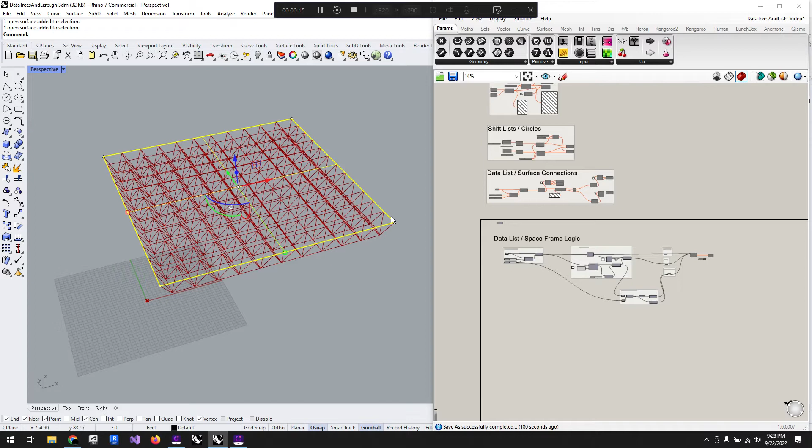So this is where we should have, during last class, been able to start having some fun and being able to manipulate our space frame a bit and start to get everything following where we were at. We've added in the bottom chords. I've done a little bit of grouping in here, so here's where we're creating our webs, here's where we're creating our bottom chords, here's where we're creating our top chords. We can see that as we move through this. Then there's our webs going both ways.

So now what we want to do is really mess this surface up. I'm going to rebuild this with maybe 4 points on each one. And I'm just going to pretend that we have some kind of glass canopy going over a cool cafe area or something along those lines.

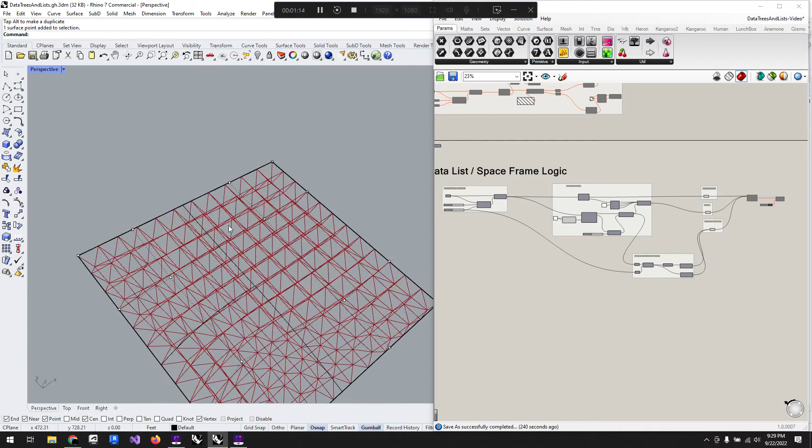And we're going to stretch this because we have a bunch of weird existing buildings that are going to be changing stuff. I don't know, just playing around with it, having some fun. We're going to twist this thing around a bit. Maybe I want it to be kind of cool. I mean, I'm not just trying to totally freeform it, but we could do that too.

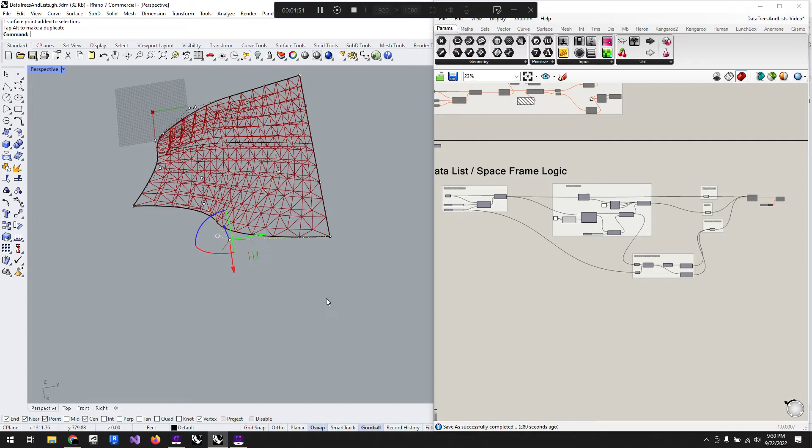Maybe we'll stretch these guys out. On this one, I'll stretch you out. And this one, we'll bring it over here. Just kind of getting it a little bit wacky, and we're doing this for some kind of good reasons.

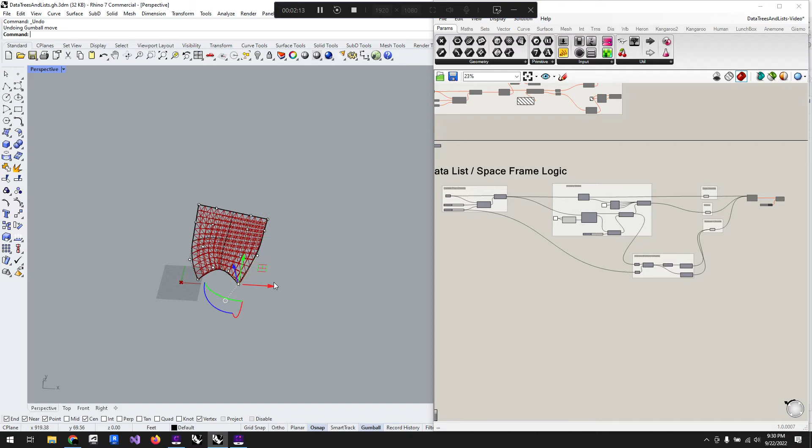And then maybe I'll pull this one up, get a little bit of an arch in there. I don't know why this is cool. Maybe I'll stop this. Actually, I'm just going to undo that, make it a little bit more simple, because I'm not going to want to look at that shape for the next hour or so.

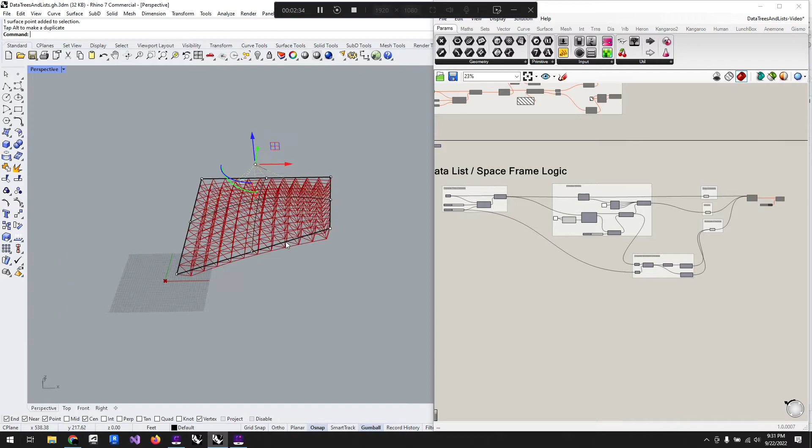While I'm doing this, I'm going to rebuild this with 3 points instead of 4, so I get one midpoint in the middle here. I'm going to grab that and give it a little bit of a dome shape. And then I'm going to pinch and pull 2 of these ends. So this end, I'm going to pull out a little bit, and pinch this one in a little bit.

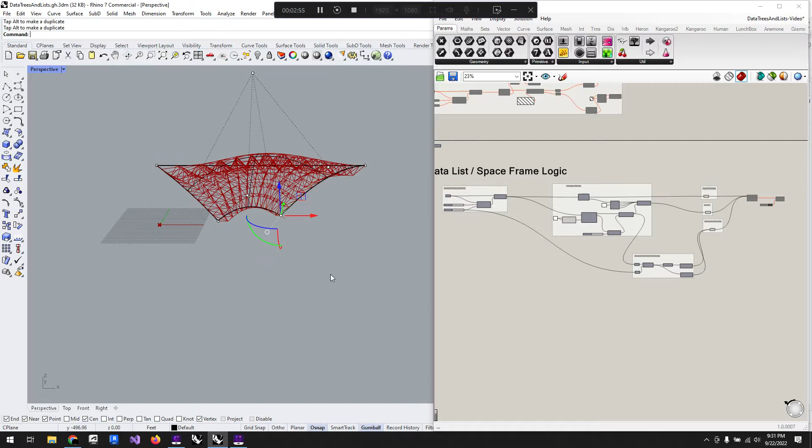And it's still not very pretty, but it's at least a little bit not as ugly as that other one I was making. So maybe this is what we want, maybe it's not, but it will serve our needs for now.

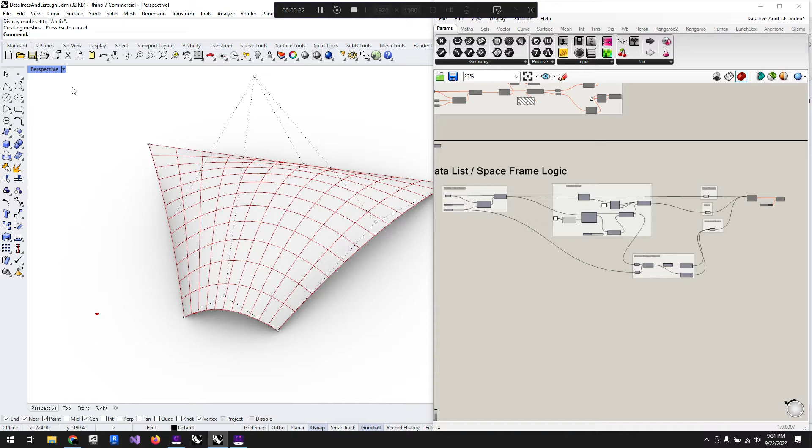So now what we have, if we look at our base surface here, and if I turn this to Arctic, it'll be a little bit easier to see. We have a double curvature surface, so these squares can't be built out of glass. Let's say we're going to do a glass canopy here - it's not going to work. We can't make glass curve that way. Well, we can, but it's super expensive.

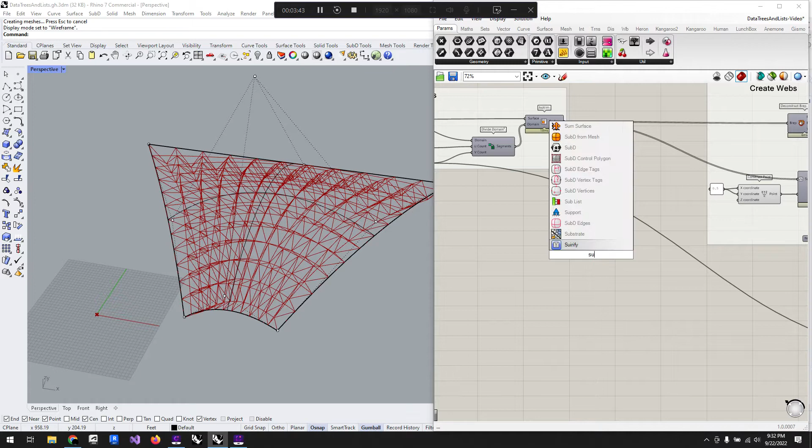So what I'm going to do is pull out all of our individual surfaces that we have. We have 132, which I think 11 times 12 gets us that, which is our domains. So I'm going to make a surface container just to drag this out and make it a little bit easier to see. And then I'm going to rationalize this so all the panels are flat, and the easiest way I know how to do that is to take each of these panels and divide them into triangles. That way, a triangle only has 3 points, and by definition, that'll always be planar, unless there's some kind of crazy 4th dimensional triangle geometry that I don't know about.

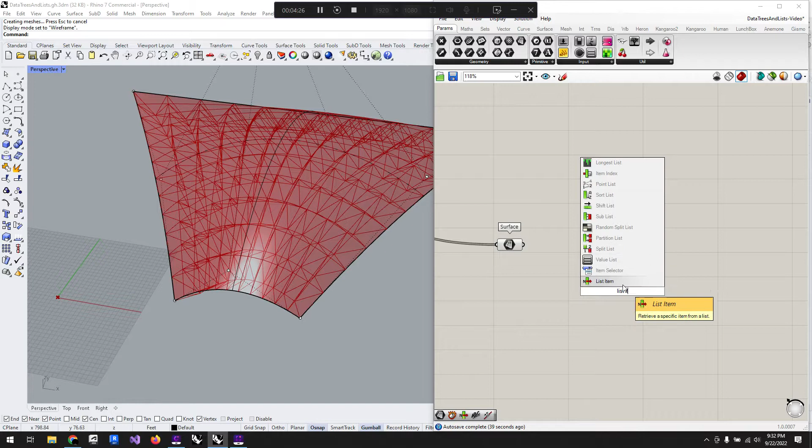So the first thing I'm going to do, since I have this list of 132, is list item - I'm just going to extract one of them. I just want one of these triangles to work on separately, so that I can get my logic right with how I want to subdivide this so that it's flat, and then apply it to everything else, similar to what we did with the surface rationalization.

So the next thing I'm going to do is deconstruct - I always think explode because of the flames on the logo. We're going to deconstruct this. We're going to take our vertices. We have 4 vertices, these 4 corner points.

I'm going to go to point list just so we can see those. The size I'm going to say is, we'll go with, hopefully 12 is big enough to see.

My logic is I want to triangulate this panel. So I'm going to go from 0 to 1 to 2, back to 0, and that'll be 1 triangle. Then I'm going to go 0 to 2 to 3, back to 0, back to 2, and that'll make our other triangle. So if I go to list item...

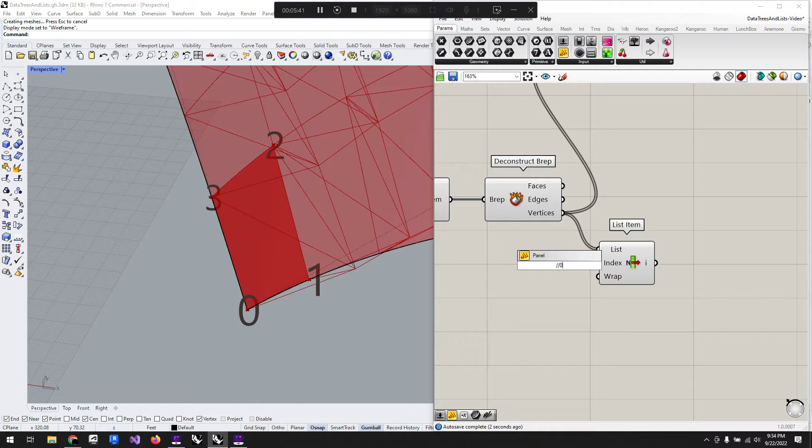I'm just going to copy this over. Instead of trying to find it, I'm going to put my vertices in here. One way I can do it, I can say this is 0. I can copy this down and say this is 1. And go on until I get all 3 of my points, or all 4 of my points here.

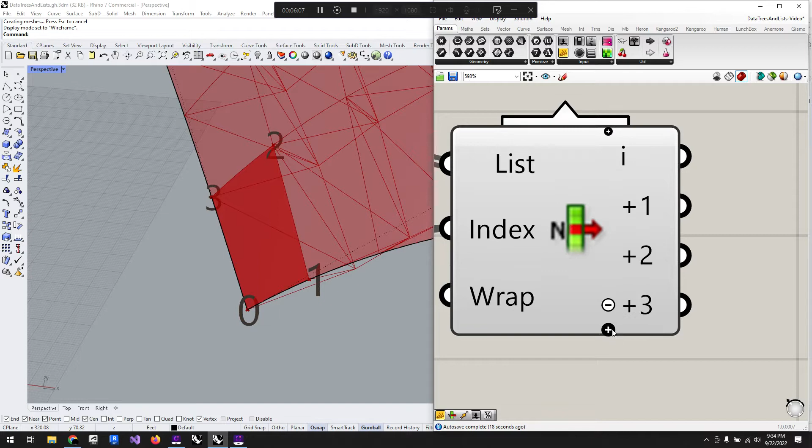But the faster way to do that, if I zoom in really close, I've got these sneaky buttons, and so i is equal to index. So I can say i plus 1 plus 2 plus 3. This gives me all 4 of my points now. A little bit faster way to do that, and a little bit cleaner in terms of this node.

So then I'm going to come in, and if I go to my surfaces, I'm going to go to freeform. There's this 4-point surface, and there's kind of a little trick, is that it will actually take 3 points. So if I say, okay, here's point 0, I'm going to connect that one in. Here's point 1, I'm going to connect that one in. Now I need point 2, connect that one in. It will actually build me this surface.

If I hide this, now we can see I've got my triangle here. So now I need to build another triangle. So for this one, I'm going to say 0 to 2 to 3. And this gives me my 2 triangles.

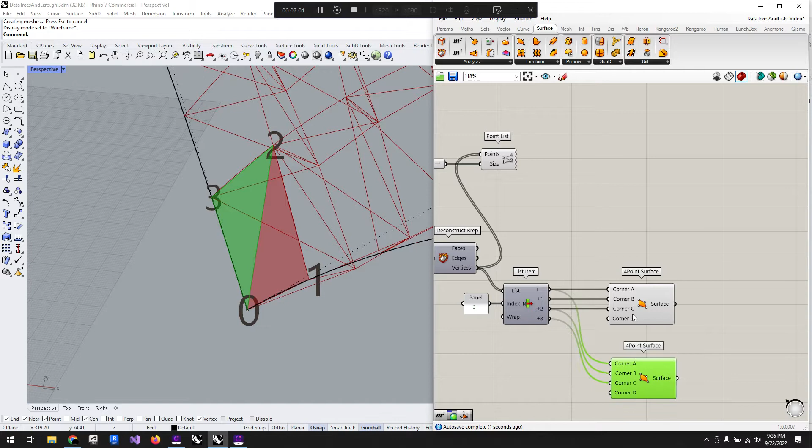And so now I have planarized, and we can see here there's like a curve happening, and we see our straight flat edges.

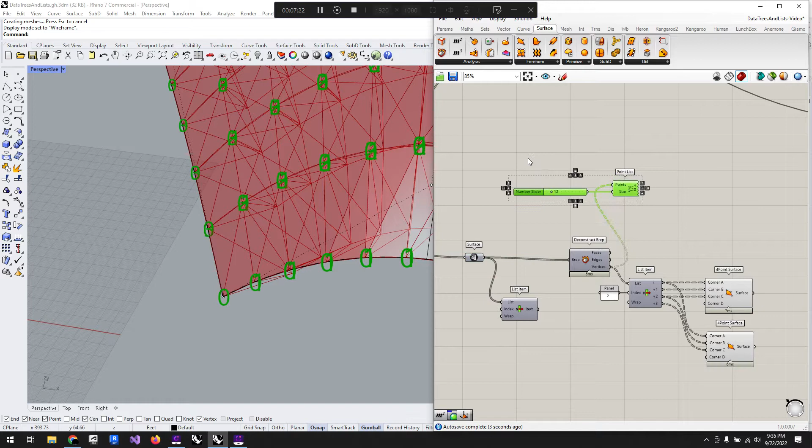I can now apply that to everything. So I can drop out this list item, because I want to take all of my surfaces now and do it to everything. And I can delete this points list because it's just going to kind of get in my way. And I can delete that list item because now I have kind of my planarization, and I can just group this if I wanted to make it kind of clean, and always label groups.

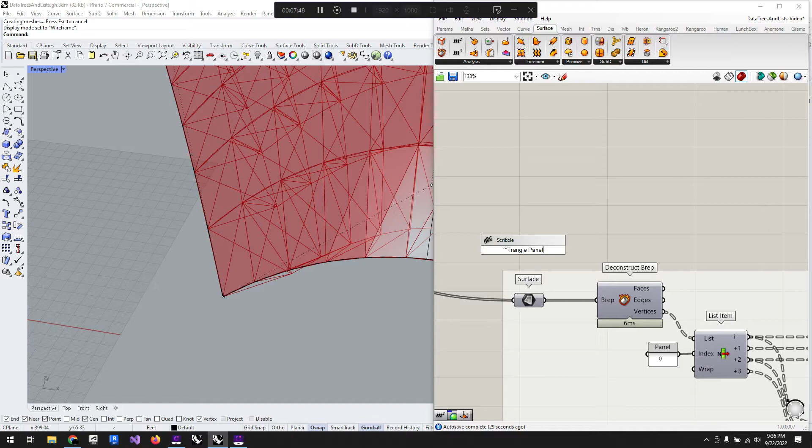So we're going to call this triangle flat, or triangle panels. That should be enough. Right click, add a group. Perfect. So now I've got a little bit of logic here.

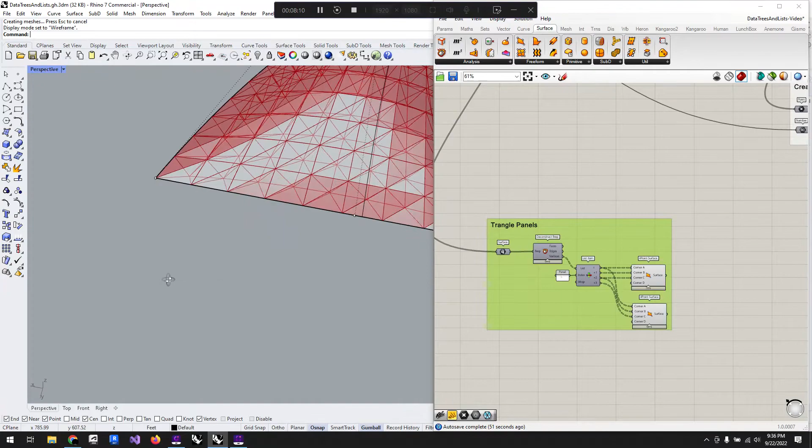If I zoom out now and I kind of move around, the fake sun in Rhino is showing me now they're kind of working along this flat. It looks a lot better and a lot more realistic than if I had them all along that double curvature, super expensive glass.

So now what I want to do is I want to be able to create some labels for these, and also kind of build this out and make it a little bit more realistic. I'm going to create a list of all the panels that exist in this geometry, and I'm going to label them out for like a cut sheet.

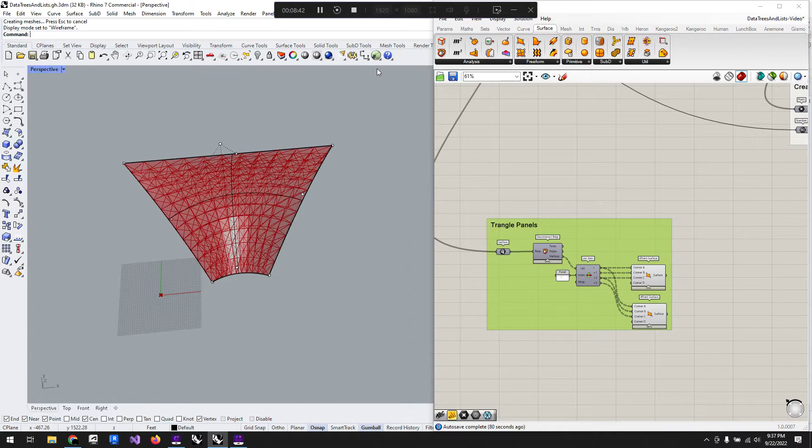If, let's say, we're going to have these water jet cut, we want to make sure that all of our dimensions meet the criteria for that water jet, and we also just kind of want to be able to itemize and keep track of everything. I'm just going to bring this up a little bit for fun.

And so in order to do that, I need to get a list of every one of these panels, and I need to take a plane that's in plane with this triangle, and then I need to orient that to be flat so that I can see everything in a flat world, because a water jet is going to cut a flat panel. And so we kind of want to orient that, help ourselves out, help the fabricators, help our contractors, and also help ourselves be able to kind of keep track of everything we've got here.

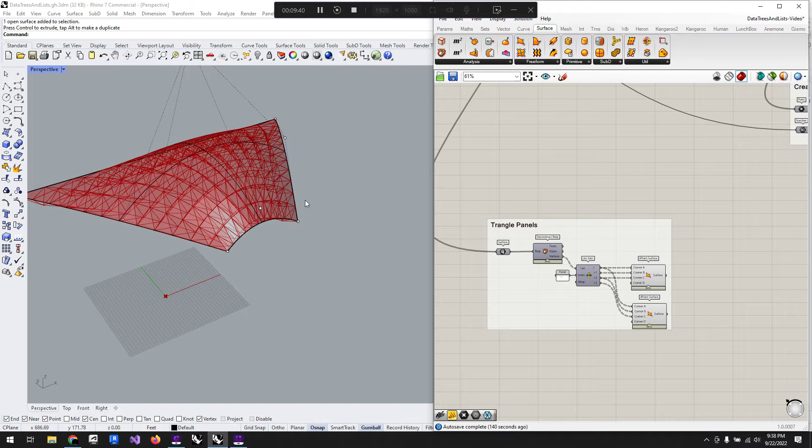And this is directly related to data sets, because we're going to take the data inherent to this 3D model, extract it into a list. And so then our list of triangles and our list of panels and everything's going to be all congruent.

And so in order to do that, we're going to use a node called orient, and we can see this icon here shows like two planes being oriented. And so for that, now that I'm kind of out of this group, I'm going to make another surface container.

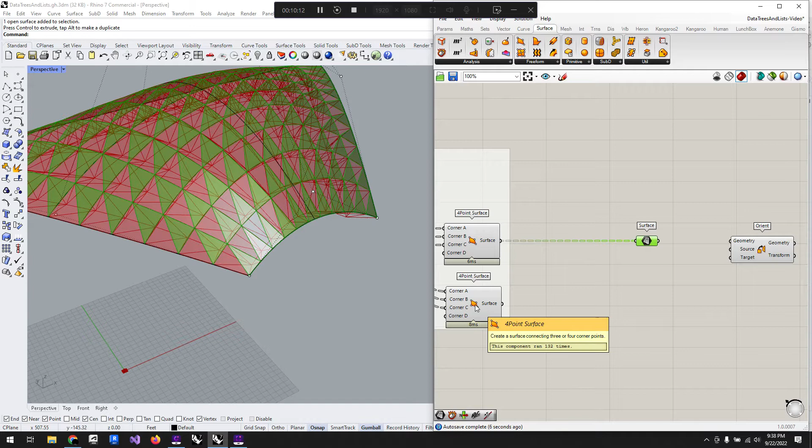Again, try to keep everything a little bit cleaner. We can see here we have kind of like panel A and panel B of our quads. So each quad is made up of two panels.

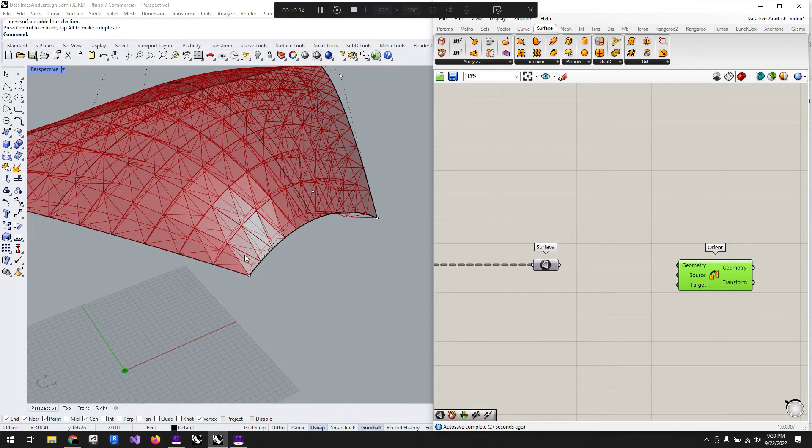To start, I'm just going to work on only one of these at a time. So we're going to need our geometry that we're going to move. We're going to need a source plane, which is in plane with this, and we need a target plane. So I'm going to create a list of planes that are just flat in the XY world, and we're going to see how that's going to work out, but I also have to get our panels here.

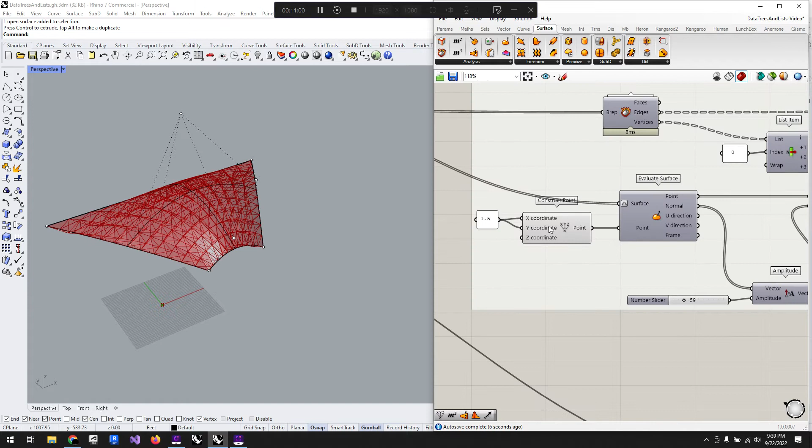So if I go to evaluate surface, I grab this, and then for my point, if we remember the beginning of class, I was saying that this evaluate kind of needs more of a numerical point than a 3D graphical point. So I'm going to come in here and say construct point. Bring that in, and for now it's just at 0, 0, 0, or this corner, which is completely fine. We could also say like 0.5. We can move this point around, but for all intents and purposes, we actually don't have to do that.

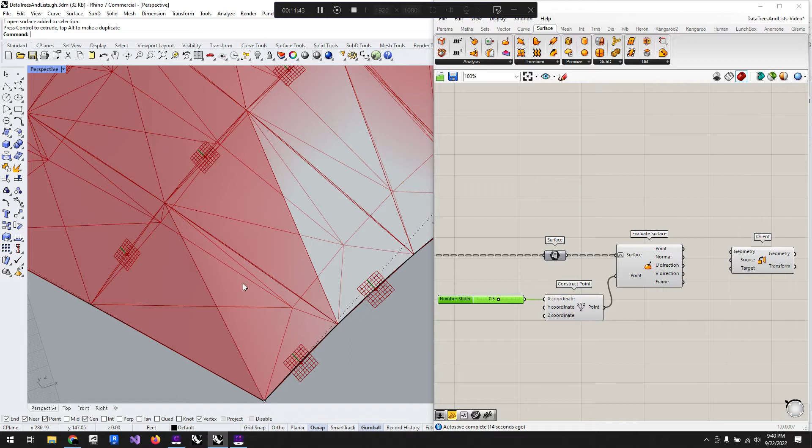Oh, got to reparameterize all of this. So now that moves that to the middle point, but that's actually not important because we know that wherever I move this plane on this triangle, this is a flat triangle. So it's kind of redundant to play around with, but it's completely fine if you want to come back and mess with that, all the more power.

So now we have our source frame, which is a cool part about this evaluate surface. It does give us quite a bit of information to use there. So we're going to bring that into our source. We're going to bring our panels or our surfaces or triangles as the geometry we'll want to move.

And now we can see we're getting just a mess here. And the reason for that is our target only has one plane, or the final plane is only defined by this world XY. So it's just stacking everything in one place, and we don't want that.

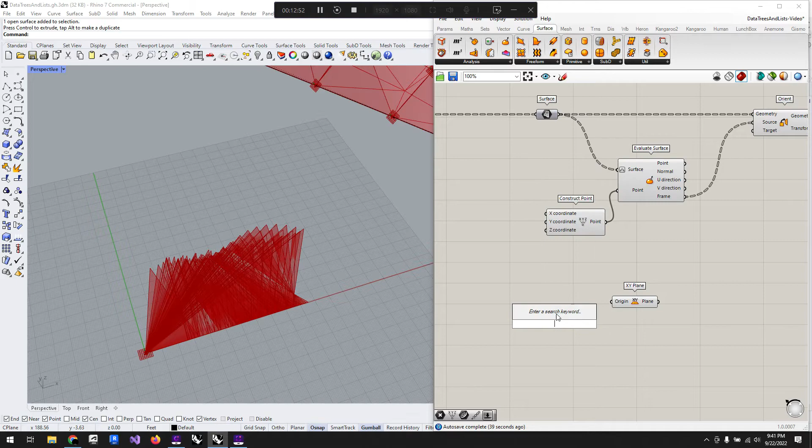So what we're going to do is make an XY plane, and I'm actually going to set a custom origin for that, so later on if I want to I can move these around. To do that, I'm going to make a point container, and I'm not going to reference any Rhino geometry. I'm actually going to right click and say set one point, and this will allow me to drop a point anywhere.

And then if I click on that, now I have a gumball and I can move that, but it's not Rhino. If I turn off the preview here, you can see that disappears. So it's actually a Grasshopper point contained within itself, kind of.

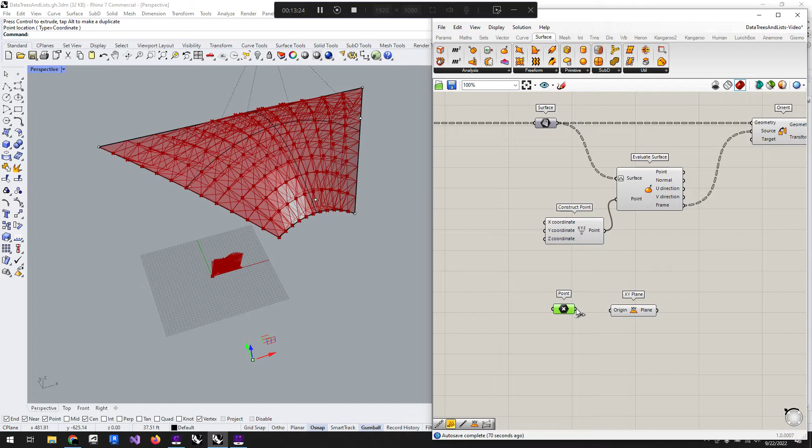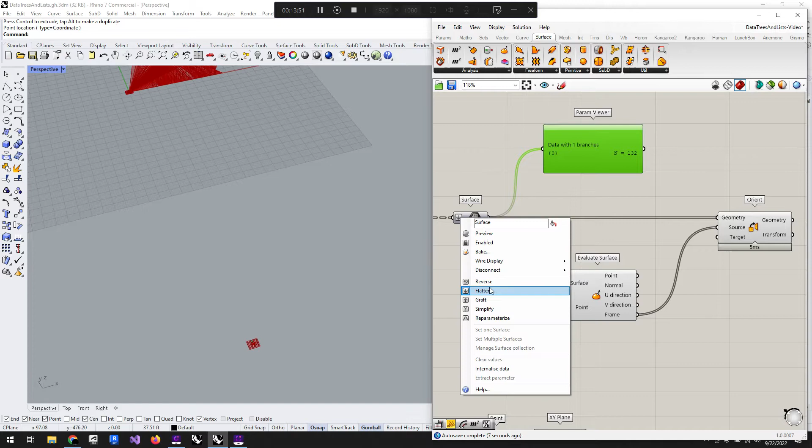So I'm going to drag that into the origin, and then I'm going to make a linear array of these that has the same data structure as what we have here, if we come up to our param viewer. I might just flatten this out. Now we can see I have 132 panels, but I typically don't like to flatten things if I don't have to. So I'm actually going to leave that and say each one of these is in its own branch, each panel is. So we have 132 panels, we have 132 branches. That's essentially what I'm going to recreate down here.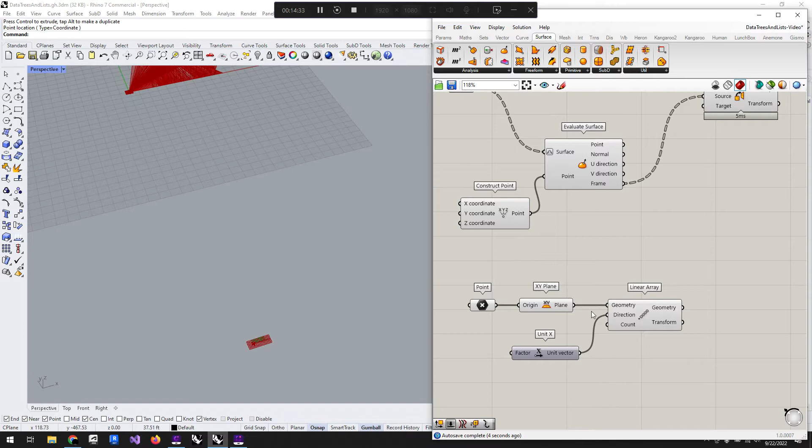So I'm going to do a linear array, and we're going to put in this geometry, and then for our direction I'm going to look over here and say I want it in the world X. If I just type in X, it'll give me a unit X vector, and I don't want that for the count, I want that in the direction. Rather than having to pipe in an amplitude and bring that in, there's actually an easier way to do that, and that's this factor. So for the factor, I'm going to say maybe 200, which will give me enough room in between each of these. So now if I zoom out, I can see I have this marching along of all these panels.

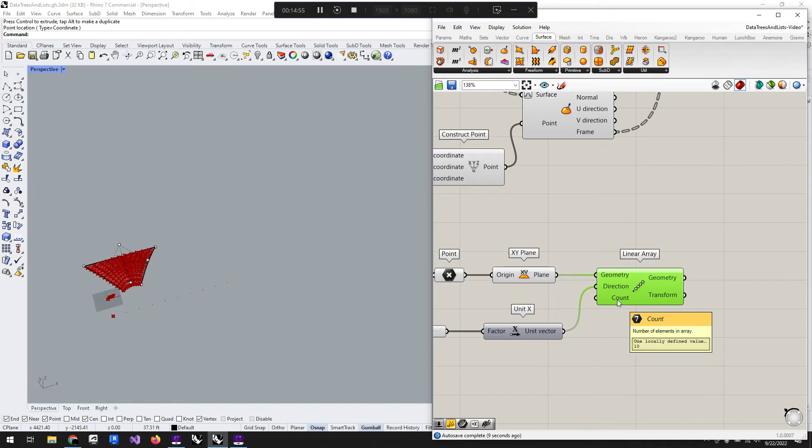But I only have 10 of them currently, and I need 132. So what I can do is I can say list length, and most of what I'm going over here, the major ones, are all under this lists, which is under the sets tab.

And again, if you hold Alt and Control and then click on it and hold your left mouse button down, it'll show you where the stuff is coming from.

So the linear array is actually a transformation, but list length is again back in sets. So I'm going to grab the length of this, and I'm actually going to flatten it so that I just have a single number. If I leave it expanded, you can see it's going to give me a different data set here.

To show how that's working, if I pop open a blank panel, we can see the list length is 1, 1, 1, 1, 1, 1 forever. But if I flatten it, think about eggs in an egg carton - I'm putting all my eggs into the same carton, and then it's just going to count them. Whereas before, each panel is in its own egg carton, so there's only one egg in a carton. That's kind of stupid. No one would do that with eggs, but it's kind of the way this is working.

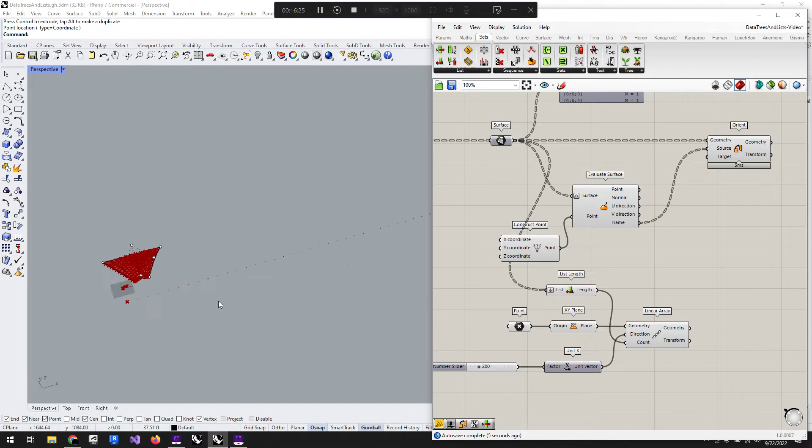So take that and enter into my count. And so now I have, you faintly see it here, but I have like 132 planes that I can then put into my target.

And we can see here we're getting an error. The reason for that is that my data structure is not the same. So I've got data with 1 branch that has 132 items, and then up here I have data with 132 branches that only has 1 item.

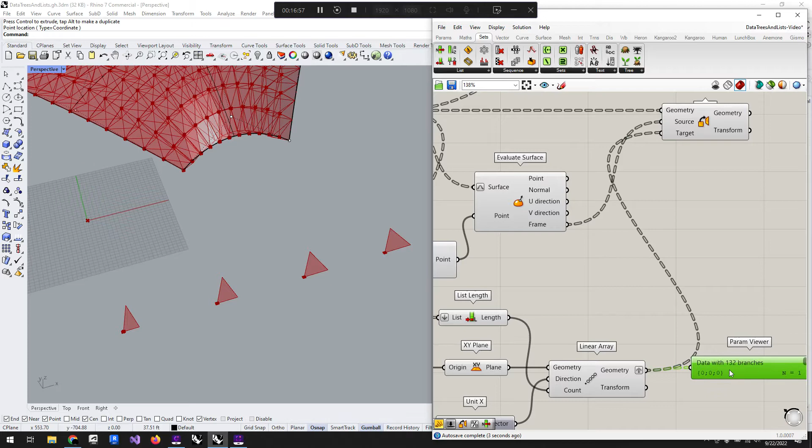So what I'm going to do is I'm actually going to graft this. And now we can see that data tree is actually the same. So in that param viewer, both of these match up - data with 132 branches, data with 132 branches.

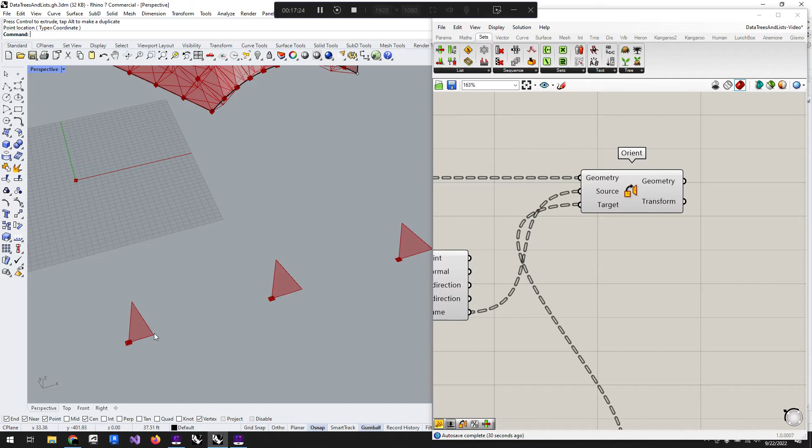So now all of this information is coming in the way that we want it to. The next thing I want to do is be able to create a label for these so that I know if I'm trying to get information about just this one panel, now that I have it kind of separated, I want to know where on our model that exists.

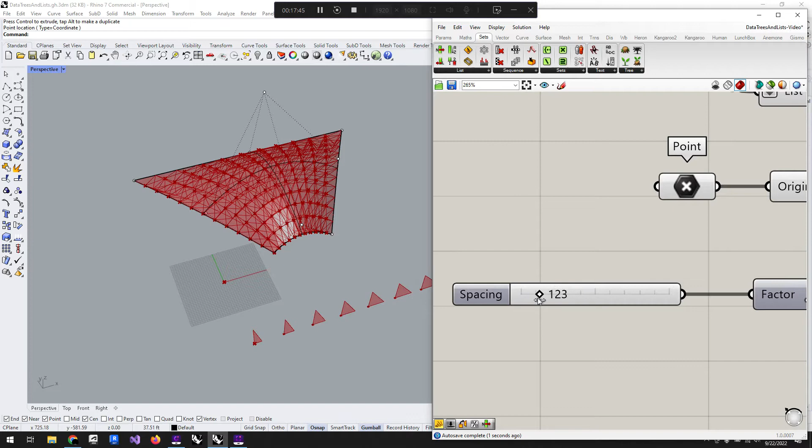The other thing I'm going to do is right click on this and call it spacing. I'm going to turn this down just a little bit - it looks like these are a little too far apart, so I can tighten them up, just so long as they're not touching each other too far. Maybe 170-ish, it's going to be fine.

Okay, so now I need to create a point and a text tag that will allow me to tag each one of these. So if I go to tag, there's text tag here - this is just a regular text tag, but there's a text tag 3D, and this gives us a few more options, like text size and everything like that.

This one is kind of scaleless, so it'll scale to the viewport and get bigger or smaller no matter what, and it can be a little confusing or obfuscate our model and information that we do want to see. So we're going to use the text tag 3D.

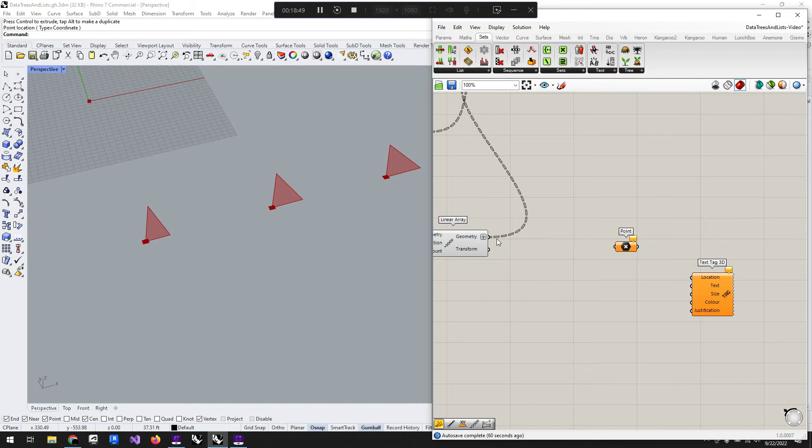For the location, I'm actually going to take this linear array and pull this out. I'm going to grab a point - I could grab a plane, but a plane and a point transfer over pretty well, so it'll let me do that. I'm going to move this.

If I look over here, I'm going to move it in the Y, so I'm going to take this and move it in the Y with a unit Y vector. And for the factor, I need a negative number. So if I double click on the gray side over here, I can set this minimum to -100, and then I can drag this into the negatives to bring it down. So it's either going to be positive Y or negative Y.

So I want my text tag to float a little bit below each one of these. I don't want it to be completely in line with that corner, just so that geometry can be clean and on its own. So here's my location for my text.

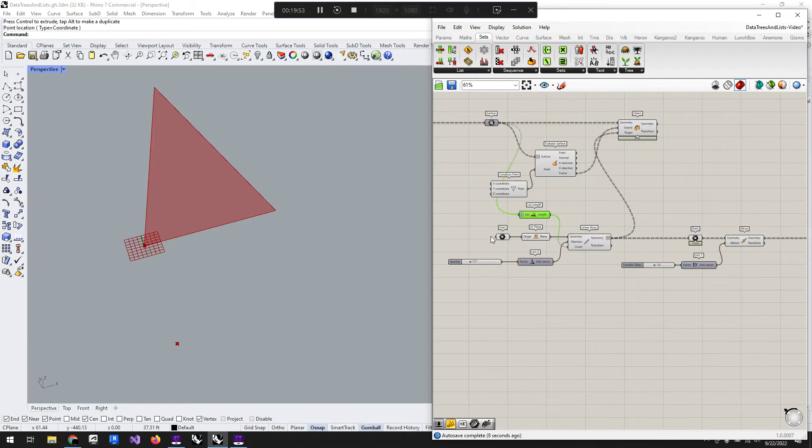For my text, I'm actually going to get a series. And for that series, I can take this point, or even this geometry, and I'm going to say list length.

Again, similar to what we did up here, we're getting the total count of panels. Now I just need a total count of planes because they're one-to-one with a panel. So if I grab that, I need to flatten this so I only get 132 as a list, because I'm creating a series of numbers instead of just a single number.

For the start, I'm going to leave that at 0, step, leave that at 1, but for the count, I'm going to put in this length. And what that'll do, if I open up a panel, now it gives me 0, 1, 2, 3, 4, 5, 6, 7, and so on and so forth.

So if I bring this into the text, I'm probably going to have to change the size. Oh, and we're going to see it's going to kind of crash because it's putting all of the text. Again, we're looking at matching up our data here.

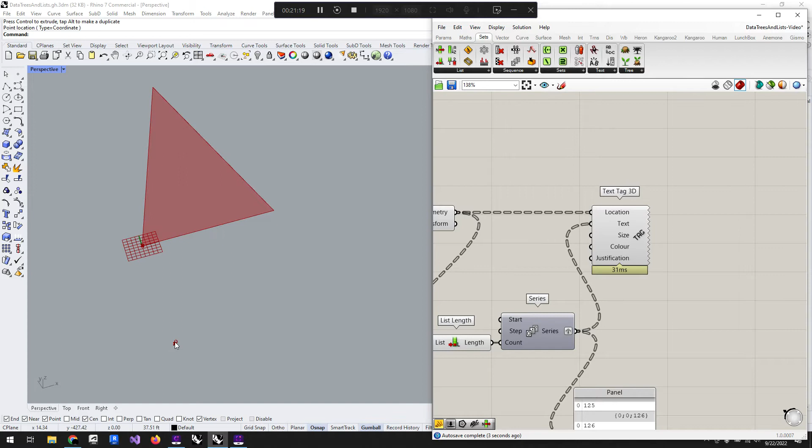So here I have everything in its own, like one list, and up here everything's in a separate list. So you could either flatten or graft one of these, and it'll fix it. So if I say for the series, and if I graft it, now we can see I have 0. Well, it's a little too small, so again, bring this into the size.

So now we can see similar data. I can grab my param viewers and double check that again, but now I have 0, 1, 2, 3, so on and so forth.

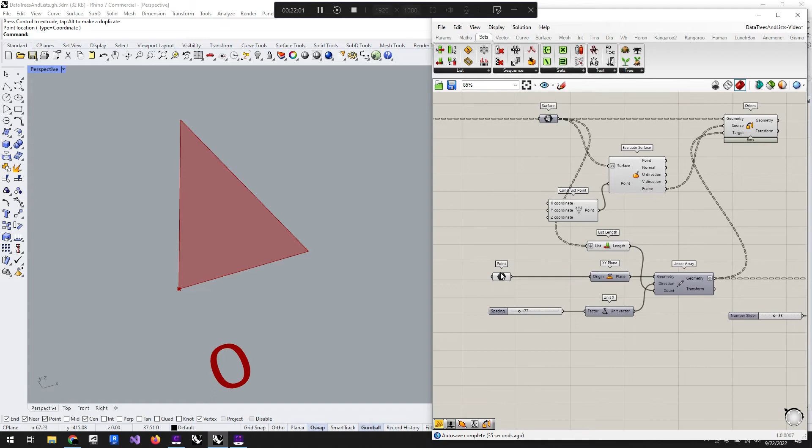And if I kind of hide this stuff for now so it doesn't get in our way, it makes a little bit more sense. And I'm going to leave that visible for now because we're probably going to reference this. And if I group this, I'm just going to say location - there we go, just give myself a little hint there.

So now I have my text tag. I'm going to pull this over, clean this up a little bit. And that's pretty much what I need to tag these ones.

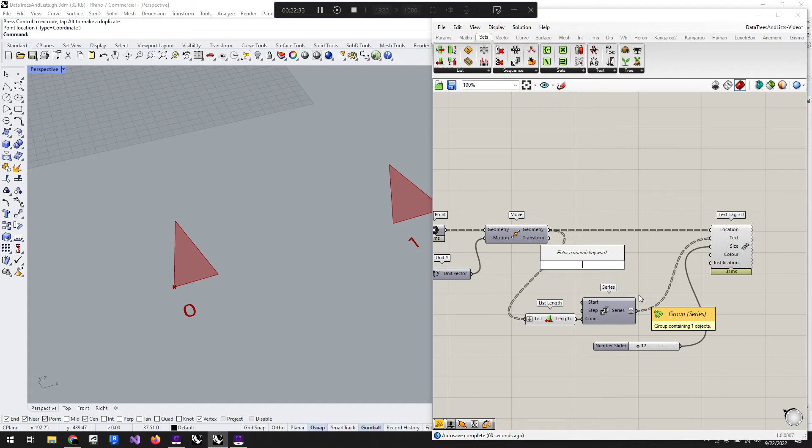There is one more thing I want to do, and it's going to involve adding a little bit more text into this, because just the 0, 1, 2, 3 isn't going to help me as much as I would like it to. So I'm going to open up a panel here, and I'm just going to copy it over.

And I don't know why I did that, but I did. I'm going to say panel, capital A dash. And what I want to do is add the series to the end of that. So if I hit enter, skinny this guy up a little bit.

Then what I can do is use a tool called Concatenate. This is like a computer term for adding strings together, and strings are a computer term for text.

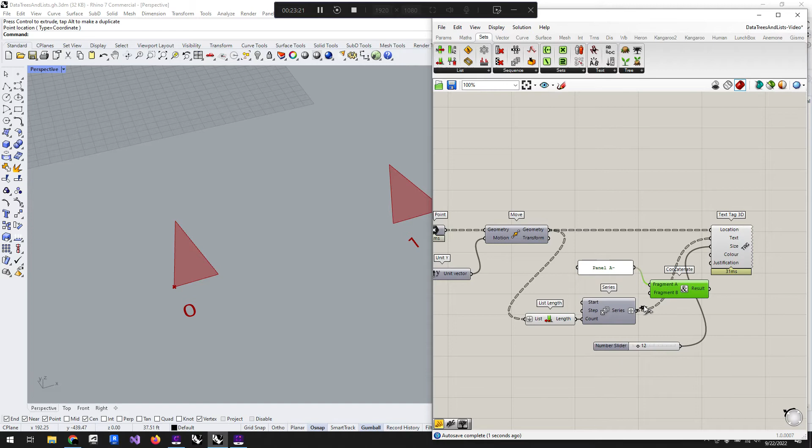So now what my result is going to be is a little bit nicer. So now I can see panel A0, panel A1, panel A2, panel A3.

The reason I'm calling it A is because we have 2 panels per quad, so I'll have an A panel and a B panel for quad 0. Maybe that's not super important right now, but it will be really important a little bit later.

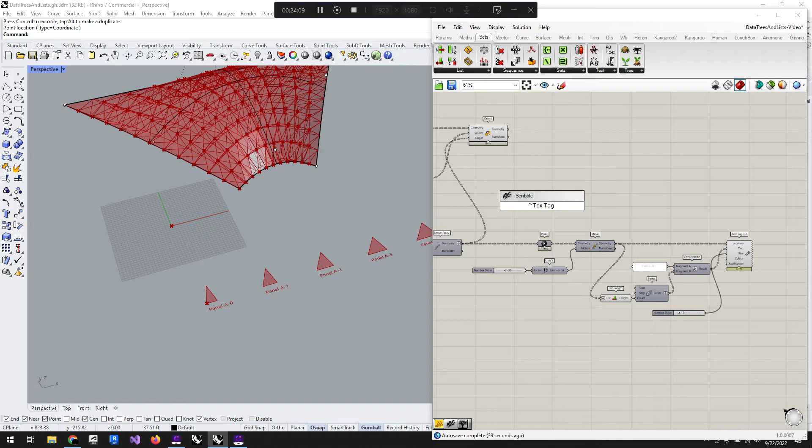So then I can say text tag - what do we call these? Cut list panels, maybe, I don't know. Maybe that's not the best way to word this. So I can kind of group that and bring this over here.

So now I need to do this one more time, and I'm actually going to do it up here. The difference is I don't have to move this geometry - I just want that tag to be right on that corner.

So if I copy this and relabel it - oh yeah, text, text is what we want, not text. Okay, text. This is going to be text tag, maybe model panels would be good.

Okay, hopefully that will make a little bit more sense. And then we actually can just bypass all of that and put that right in there. I'm going to get rid of this stuff. Oops, I'm going to bring that length from my list of another list instead of over here.

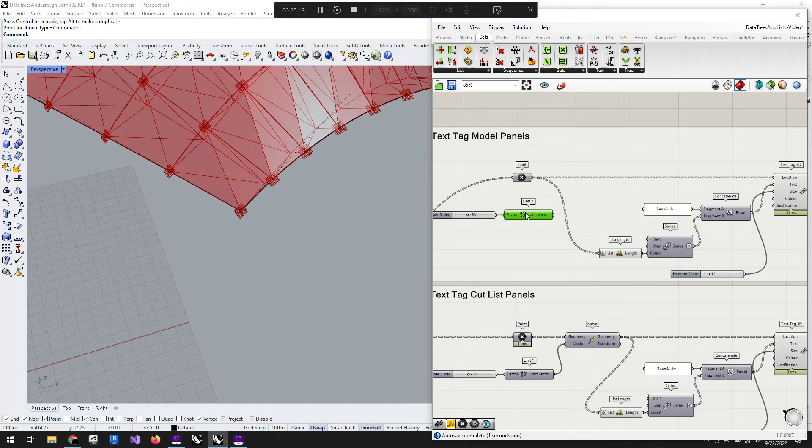And I could do the same thing - there's 132 points, there's 132 planes, we're going to be fine either way. And then just clean this up a little bit because it makes me happy.

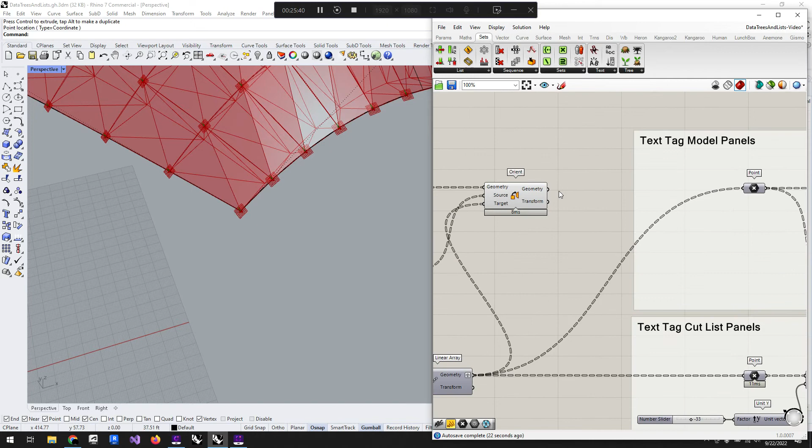So now we have to actually bring in the plane from all the way back here, which was coming from our evaluate surface. So if we grab that frame and pipe that in, we can now see we're getting a label for each one of our panels. This is a little bit big, so I'm going to bring it down a bit.

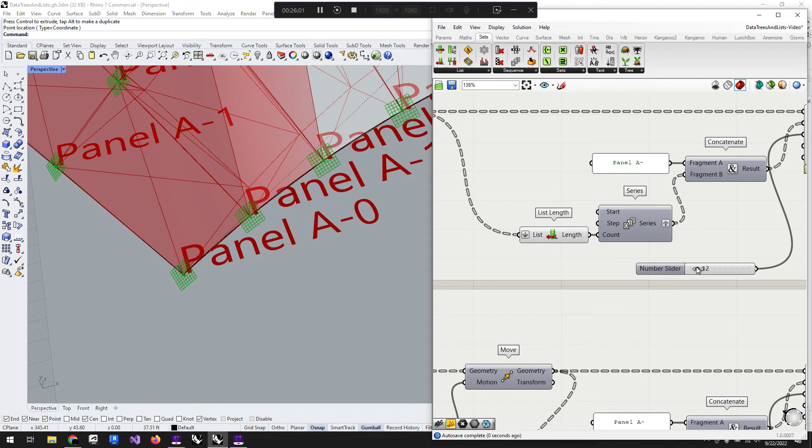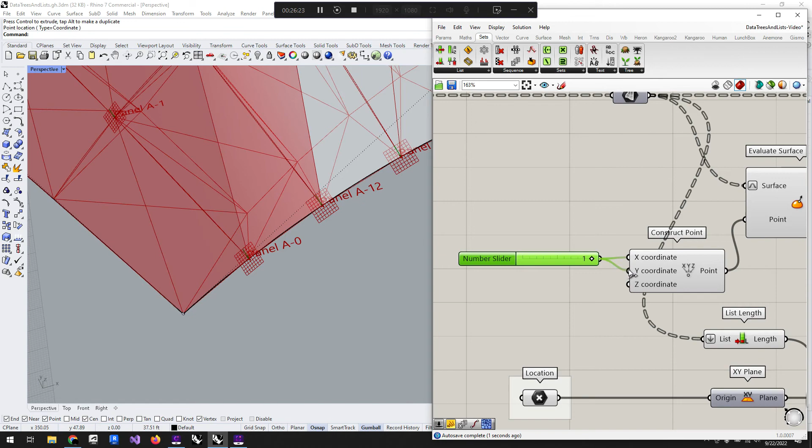I don't really like where this is being located, so I'm going to come all the way back here and put in a 1 for each of these. Oh, of course, now it's going to explode on me, so I'm not going to do that. It'll be fine, that's fine. It's just representative of what we're looking at. I think I'm just a little confused because it's pretty late at night.

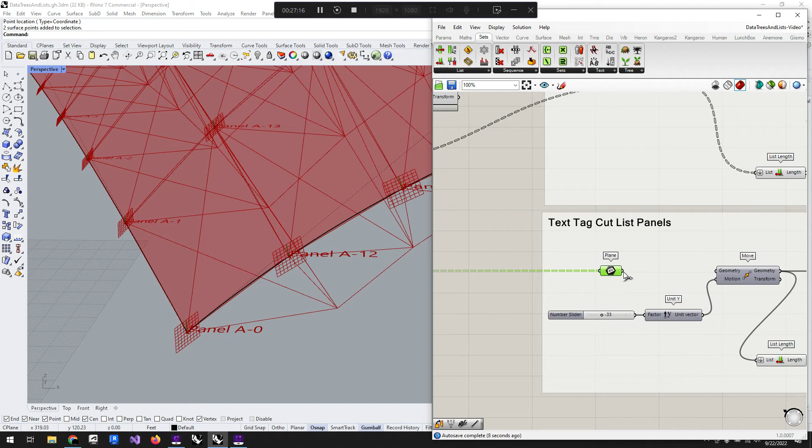Guess that's still wrong. So for location, I think this does have to be, these shouldn't be points, these should be a plane. So I'm going to grab this plane here, and then you can delete that. Make sure I add this to the group so it doesn't get all squirrely on me. And I can bring that in there. I'm going to do the same thing up here. This plane, I can delete this, and then make sure I add it to this group so it doesn't get squirrely and lost. And there we go with the location.

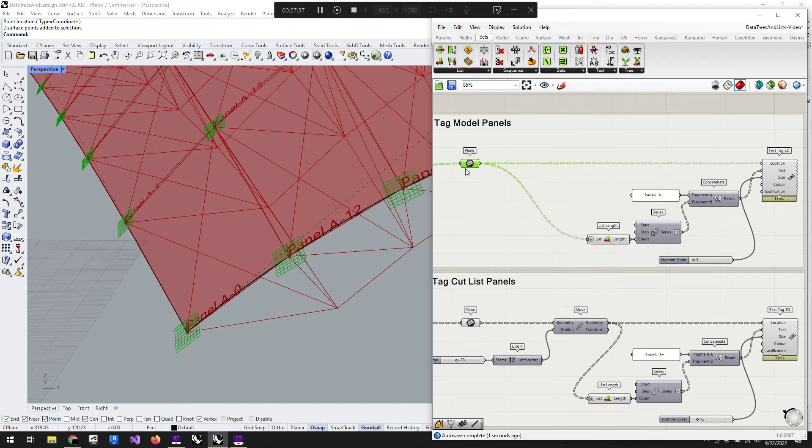So now they kind of line up a little bit better with each of the panels, and that was the whole purpose of that. I'm gonna hide this. So now we have our text tags all kind of corresponding to each other. I'm actually gonna hide these planes too, I kind of don't need to really see any of this.

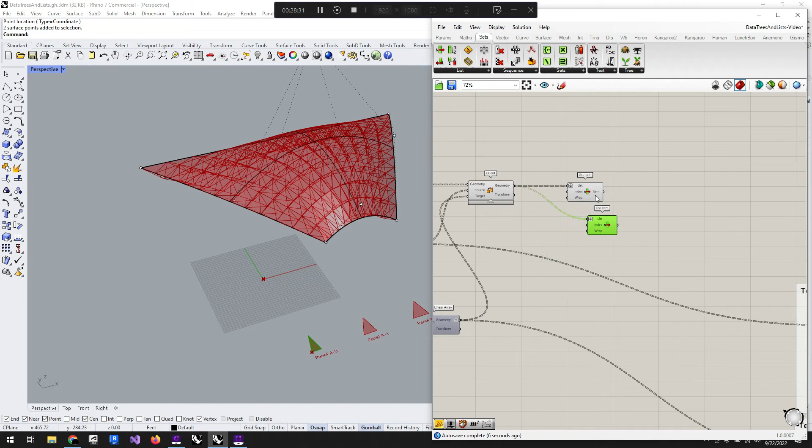So now I have panel 0 and panel 0. And if I want to check this, what I can do is actually pull these over. I'm going to make a list item, grab the transform geometry, and flatten this so that I'm not getting the first item of every one in the list. I'm going to do the same thing for the original panels over here. So now I can see I have that panel and that panel. And an easy way to check it, especially since each one of these is going to have a little bit different area, especially if I do something like this.

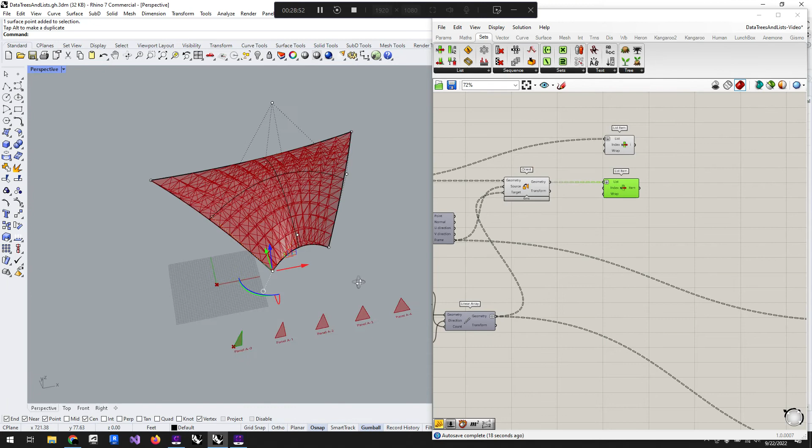No two panels are going to be exactly the same. So I could just really quickly say, get me the area. I could do a whole bunch of stuff, get the edge lengths and double check all of that further, but I just want to make it a quick check to make sure that it's apples to apples, that I'm referencing that panel 0 is panel 0. And so we can see here, our areas are exactly the same. And if I say index 1, for example, we can see immediately that area doesn't line up.

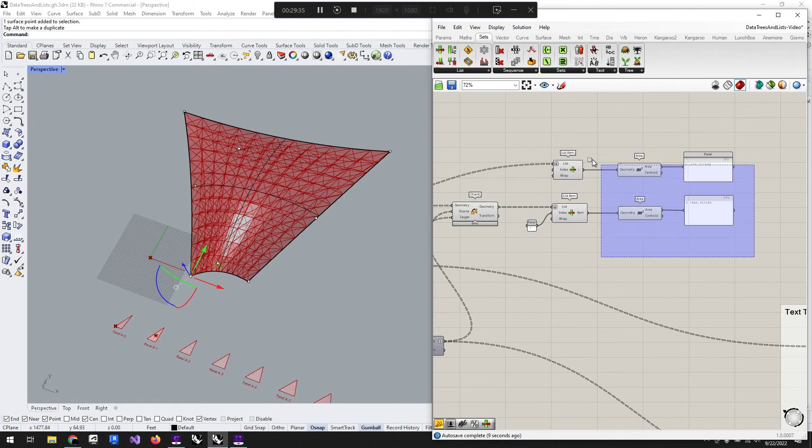So I know that panel 1, or panel 0, is panel 0. That's essentially all this was, just a quick check to make sure that we're on the right track before we get too far ahead of ourselves. So then we can see, yeah, panel A0, there's kind of a visual check too. If it looks about right, you're gonna be good to go.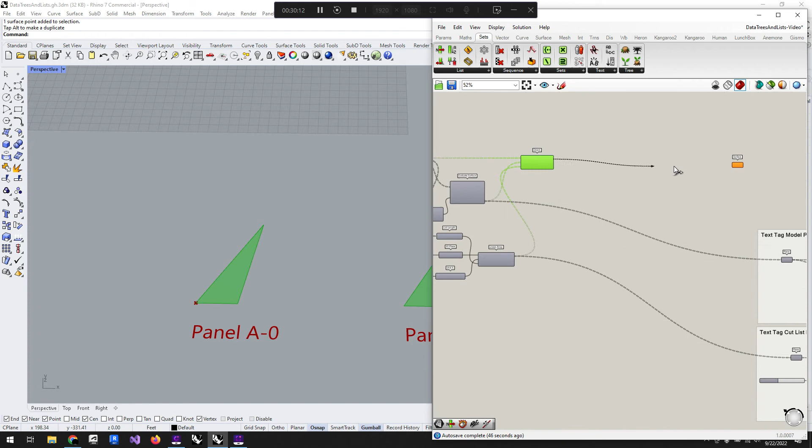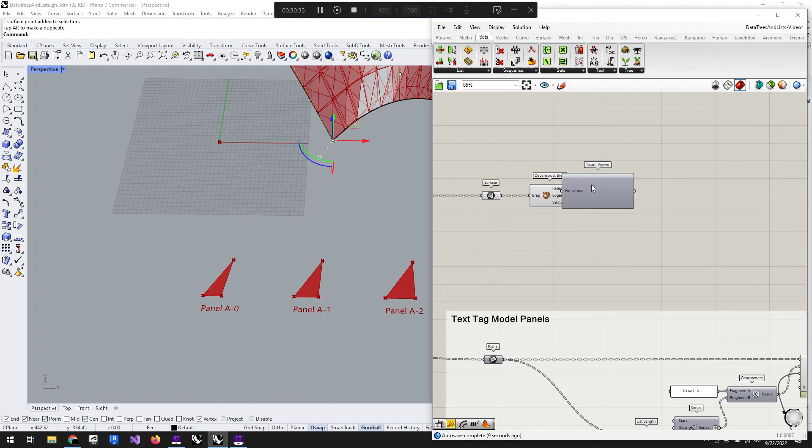So now what we can do is I actually want to create some dimensions around these. So I'm going to get a surface, surface, again just to kind of keep things pretty clean. And I'm going to get the ones that I moved, which are these. So if I grab those, bring a surface out over here, and I want to deconstruct this, deconstruct brep, and get these edges now. I have three, if I open up my param viewer, I have a really nice data set now. So for each branch that is the triangular geometry, I have 3 edges. So that's going to work out really nicely for an offset.

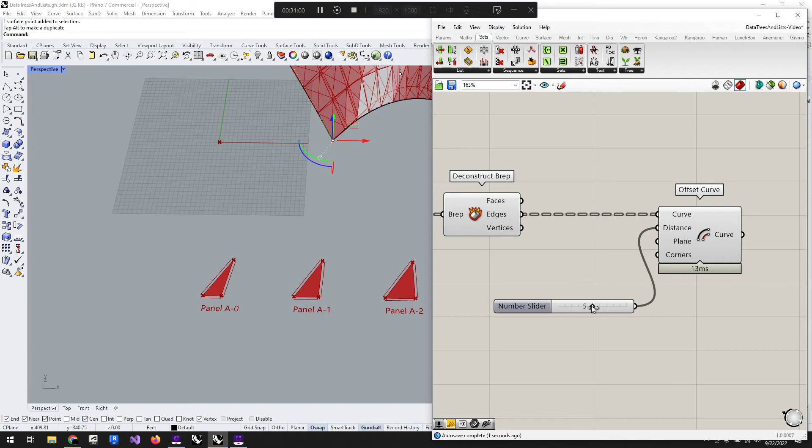So I'm going to offset these curves, and a distance, I'm going to say maybe like 5. 5 might be good, maybe a little further. Maybe I'll go to like, add 10, why not? And so the reason I'm doing this, so I know that these edges are exactly the edge of that triangle, is I'm offsetting them so that I can draw a dimension along these lines.

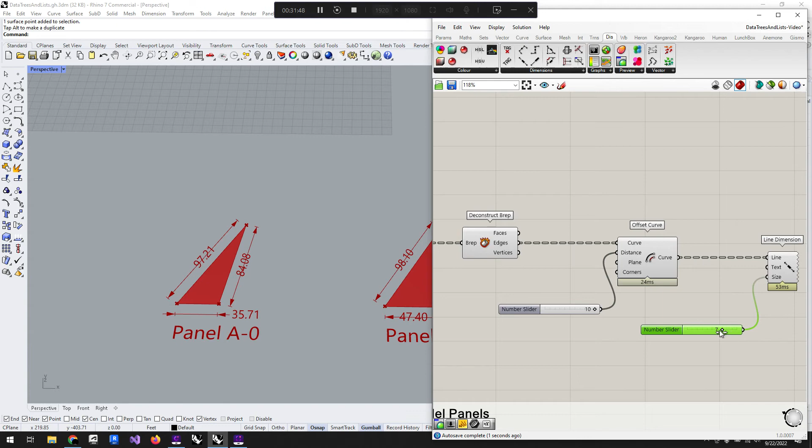So that dimension is going to be, if I go to dimension, which should be under display and dimensions, I can do a line dimension and put it over here. The only other thing I'm going to want to play with is the size, so I can put that size in. 12 is probably way too big, so for max I'm going to say 10 is going to be my max. And I'm going to bring that down just a bit because it's way too big. And that seems to be fitting okay.

So then I can take all of this and hide it. And now I've got these really nice dimension strings that are telling me a little bit more information about each of these panels. So I can say dimension, cut list panels, I guess. I don't really like that, but it'll work. Great.

So now I have this stack of everything I want to do. I've got this little group here, which I'm going to bring over and group, give it a title. I'll say 'orient panels to cut list.' Again, you can come up with your own way of helping yourself remember this stuff.

So now I have all 3 of these, bring this over, tighten things up. I'm doing that for all my A panels, and I want to do it for my B panels. If I copy that down, because I've been using these little containers that help me move things, like a surface container before I start a group, I can just grab the next one, then change my location point down here, and then change my text.

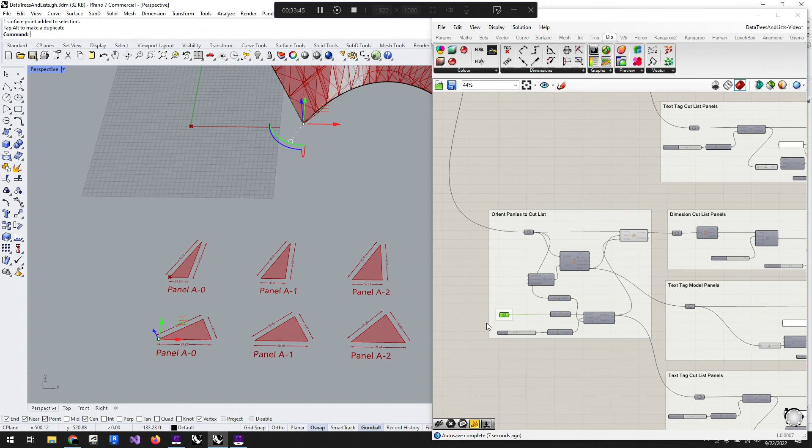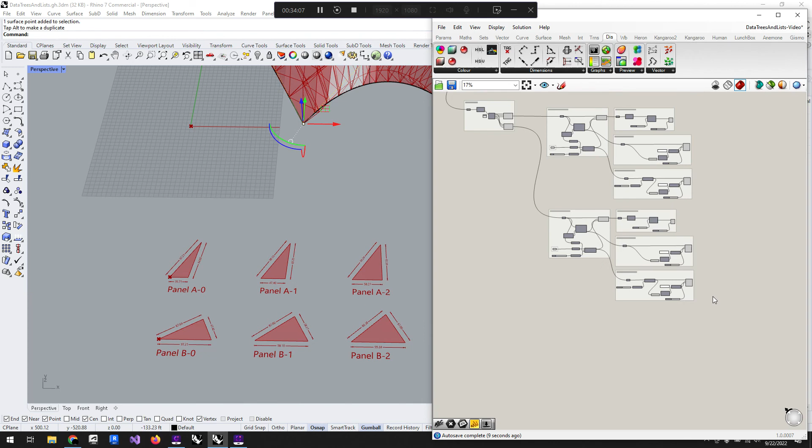So this is panel A, it should be panel B. I'm working on my B panels, and I have to do the same thing here. Actually, I could just use this same node and bring it into both, then I'll only have to change it in one place. But for the sake of what we're looking at now, I think that'll be okay. And then I can just group both of these.

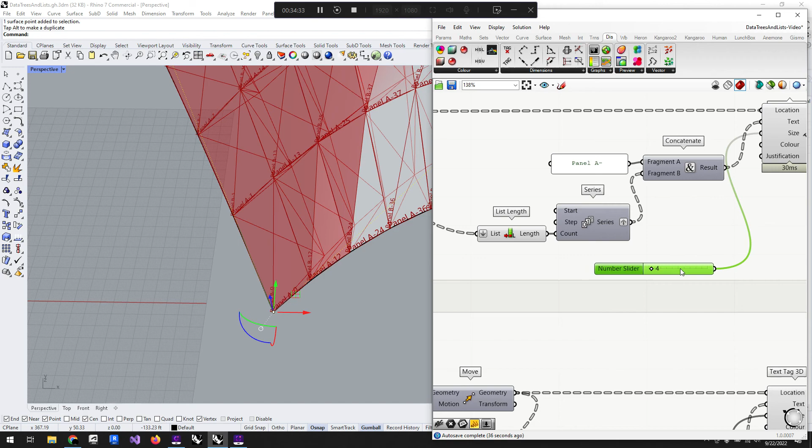Now I've got my A panels, my B panels, and I might make those a little bigger, like a 4. Just so I can see them, maybe a 5 - 5 might be too big. Yeah, 5's too big, I'll go with a 4 here and a 4 here.

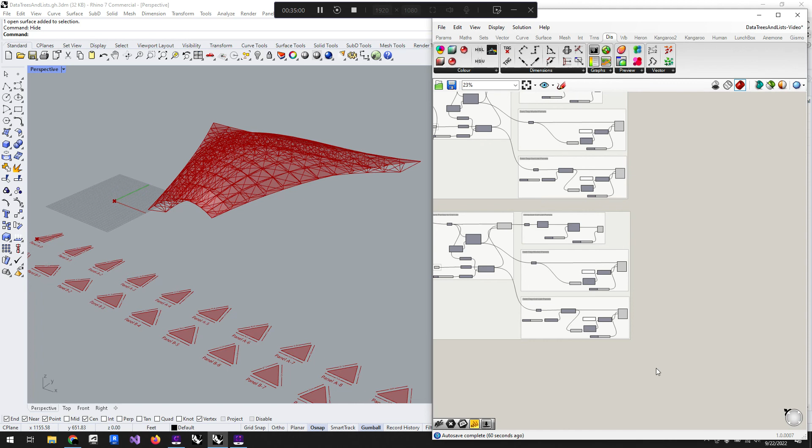And now we have a pretty cool looking space frame with a panelized surface, and all our panels are called out and dimensioned. So the only other thing to do - I'm going to hide this for now - I'm just going to do some custom display stuff to make it look pretty.

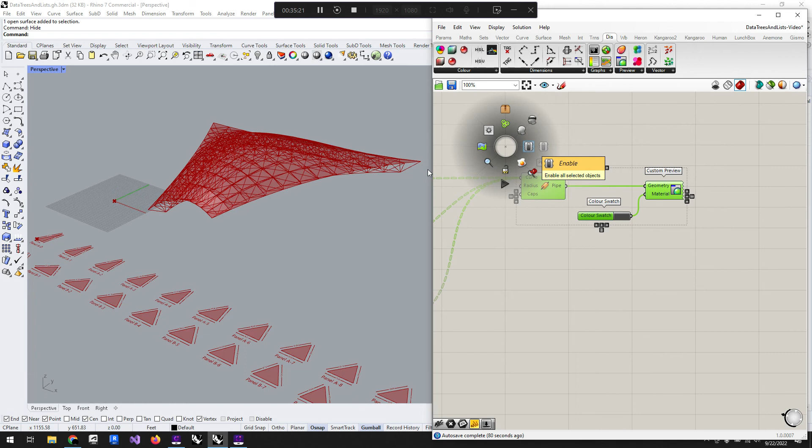So up here I've got a pipe, there's a node called custom preview and a color swatch. If I enable this - enable, not preview - it's going to take a while because it's adding a lot of geometry to a lot of different parts and pieces. And then I can take all of these and hide them, so I get this cool gray space frame kind of thing going.

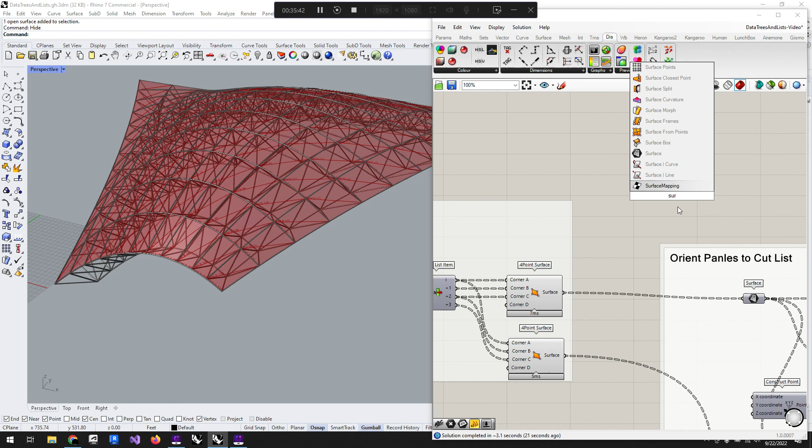Now I want to make this look a little bit more like glass. So I'm going to come over, here are my triangle panels, I'm just going to say surface, bring this up in here, bring this up in here. Again, custom preview, bring this over. The default is pink, which is lovely but doesn't look like glass. But maybe it doesn't matter, maybe it's a solid roof.

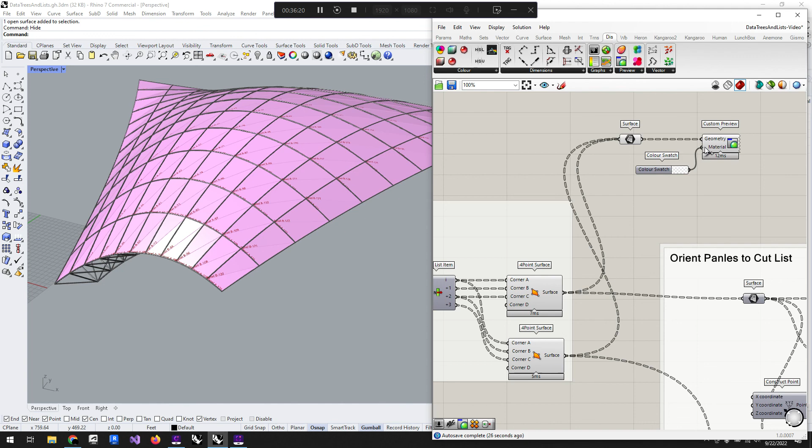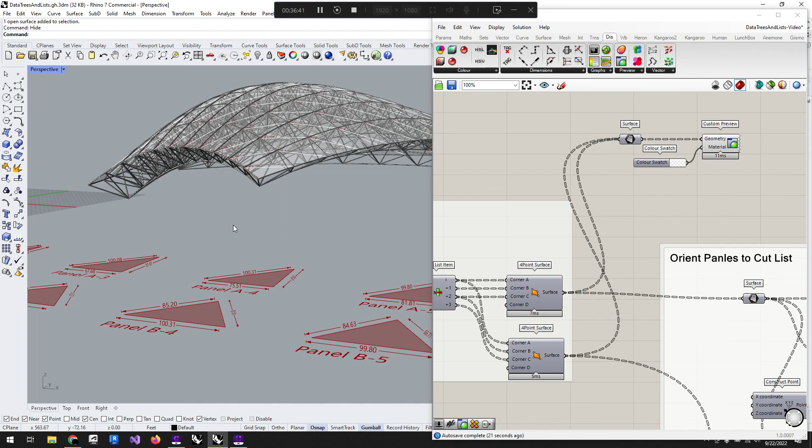We're going to do glass, so I'm going to add a swatch. If I double click on the color portion of the swatch, I can change the transparency, the value, hue, saturation, a whole bunch of stuff. There's even an eyedropper if you want to sample stuff around, which is nice. But if I plug that in and hide that original surface and hide these surfaces, now I've got this glassy looking space frame structure - a little bit more cool than I don't know, maybe what I originally thought of.

There's a whole bunch of other ways we can build space frames and stuff, but the main point was really about the use of data sets, data lists, and how all of that can really expand what you're capable of doing with your model. If you're clean about how you manage all of it, it'll save you a ton of work in the long run, especially for this, since we're looking really far in the future of how they'd actually build this - but this could even be just adding more geometry.

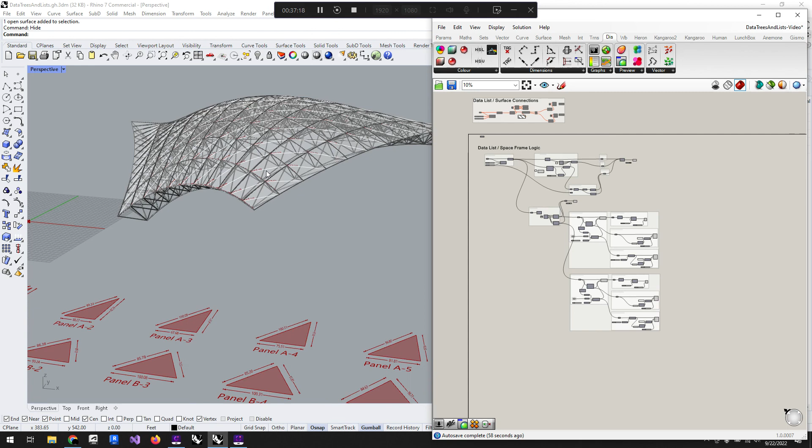We could maybe scale these or add little holes or perforations, or add like a portal frame and then set the glass into it, or there's a million and one things we could do with this. But for now, this kind of wraps up everything we went over in class, and hopefully this was helpful.